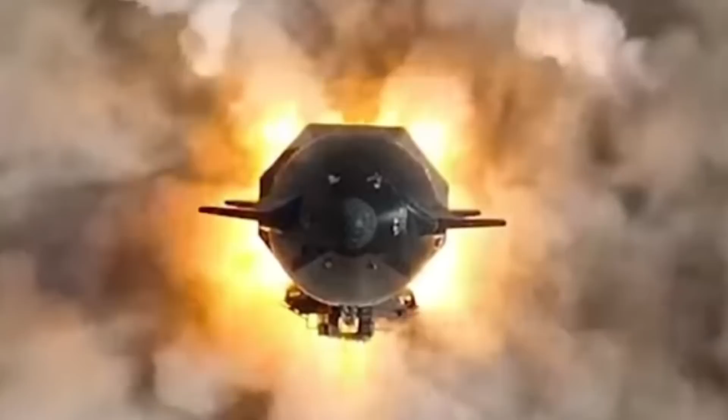A lot of people are worried about rising atmospheric carbon dioxide levels, and we should be. While it is true that carbon dioxide levels naturally fluctuate, and the levels have been higher in the past than they are now, people weren't alive back then when they were higher, and these ancient increases led to a dramatic shift in the climate. At this point, there is no reasonable doubt that human activity, specifically the burning of fossil fuels and forest clearings, has outpaced the Earth's ability to adapt and absorb carbon dioxide.

Within my lifetime, carbon dioxide levels have gone from 320 parts per million to just over 420 parts per million today. This has resulted in a warming of Earth's climate, and if it continues, there will be catastrophic damage to our crop yields along with extreme weather patterns and significant loss of land from sea level rise.

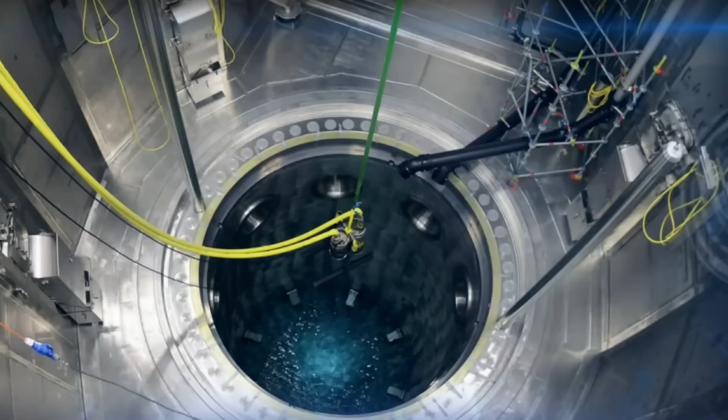That all being said, dealing with the problem has stirred up a lot of debate and government action, most of which has been worse than useless. While investments in wind and solar are now paying off, nuclear would be by far the best option.

But since there is a lot of political opposition to it, many governments have invested heavily in hydrogen fuel technology, which, except for a few niche applications, has been a wasteful distraction.

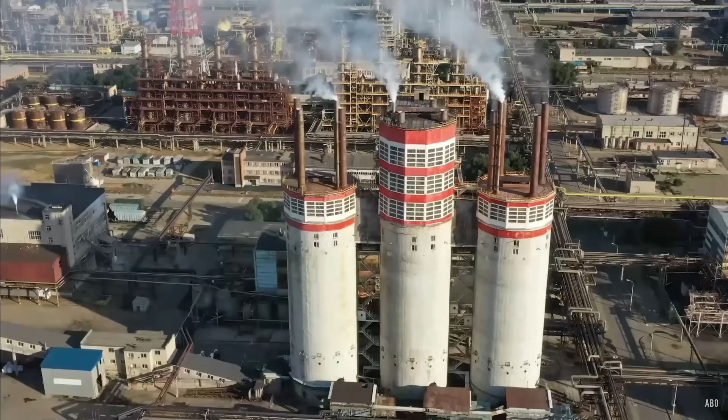Producing enough hydrogen gas today to power our homes, businesses, and transportation would produce much more carbon dioxide than just burning the fossil fuels, unless you use solar or nuclear. But nuclear plants take decades to build, and the electricity from solar power is better used being put directly into a battery. It is not efficient to use solar-powered electrolysis to produce hydrogen, then compressing and cooling it to extreme pressures and temperatures for storage before converting it back into energy.

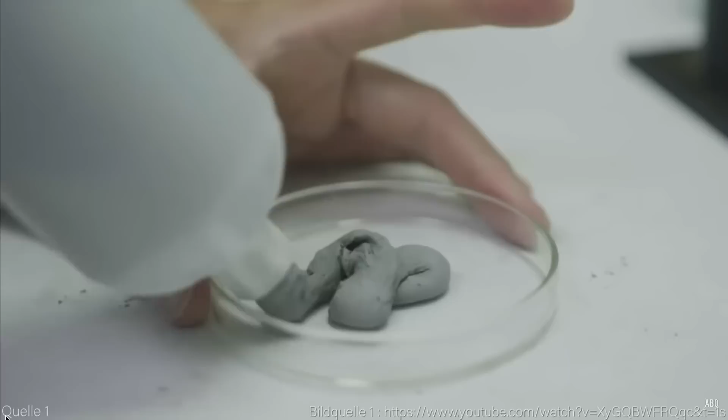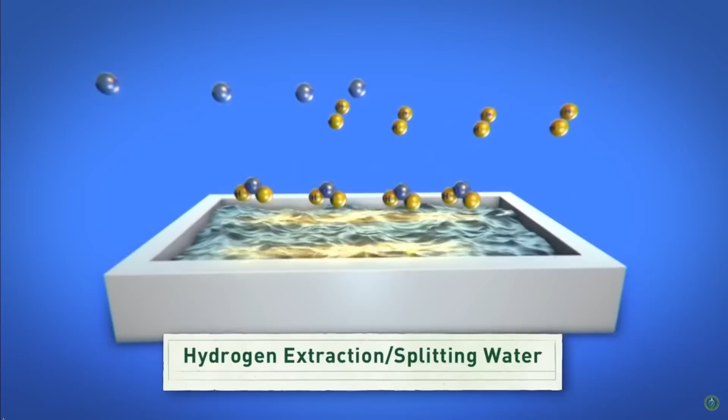We could instead store the hydrogen in power paste form, as pioneered by Fraunhofer Gesellschaft, headquartered in Munich, Germany. Power paste, which contains magnesium hydride, can hold an amount of hydrogen equal by volume to a high-pressure cryogenic tank, while still at ambient pressures and temperatures, needing only hot water to liberate the hydrogen for use in a fuel cell. If we could find a cheap and efficient way to make hydrogen, this would probably be the perfect storage solution. But right now and for the next couple decades, we can't make cheap hydrogen.

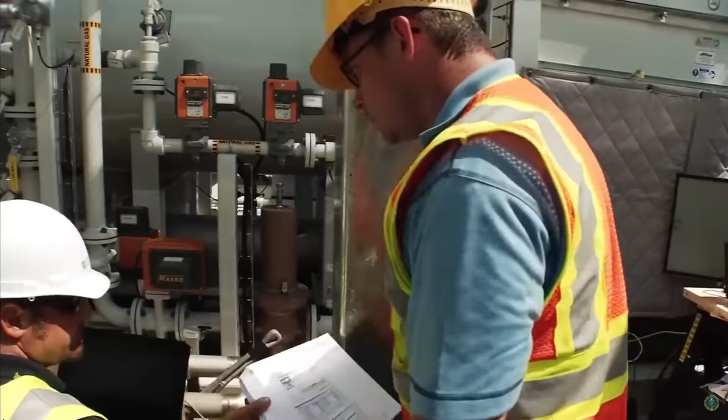And while fossil fuels are undoubtedly contributing to global climate change, the solution is not to abruptly stop using them, because doing so would kill millions, if not billions, of people through famine, extreme temperatures, and collapse of our current civilization. Fossil fuels became so ubiquitous for a reason. They are fairly easily available and are very energy dense. Almost all of the world's infrastructure runs on fossil fuels.

But is there any new technology becoming available now that could help ease this problem in the short term? Let's look to see if there's a better way.

Modern internal hydrocarbon combustion engines are about 25 to 40% efficient at turning fuel into energy. Boosting that efficiency to 50 or even 60% would allow us to produce the same or even more energy while still reducing carbon dioxide emissions. And the technology to do this efficiently is just becoming available to us.

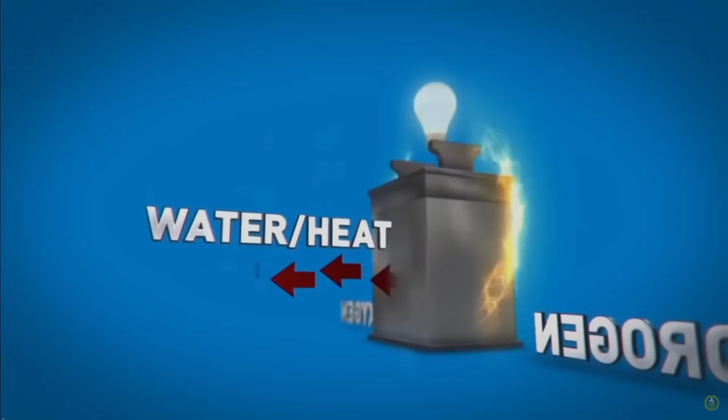The quest for efficient and sustainable energy sources has always been a driving force in human history. From fire to fossil fuels, we've sought ways to harness energy to power our world. In the late 19th century, the dawn of the electricity era sparked further interest in finding cleaner and more reliable energy solutions. Enter the fuel cell, an electrochemical device that converts the chemical energy of a fuel into electrical energy.

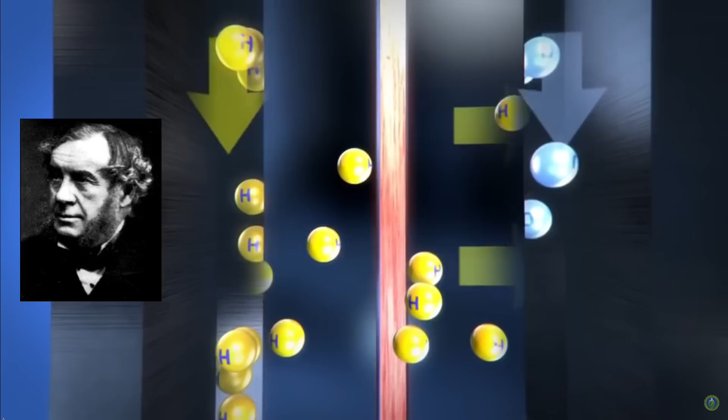The first fuel cells were invented in the early 1800s. Sir William Grove designed what he called a gas battery in 1839. But it wasn't until 1959, when a team of engineers at General Electric made them somewhat practical by designing a hydrogen oxygen fuel cell they called the Bacon cell, after its inventor Francis Thomas Bacon, not to be confused with the 19th century English philosopher.

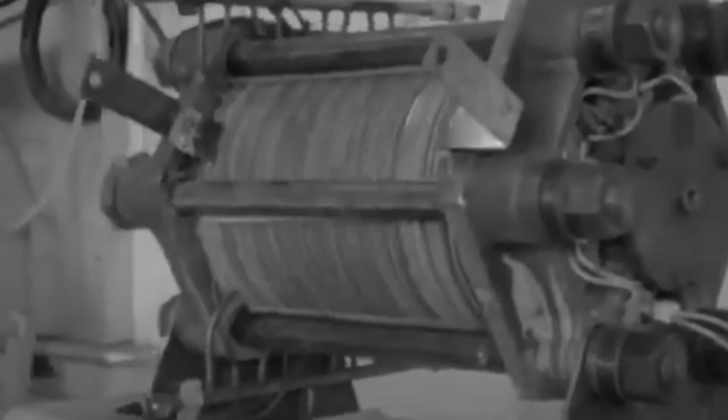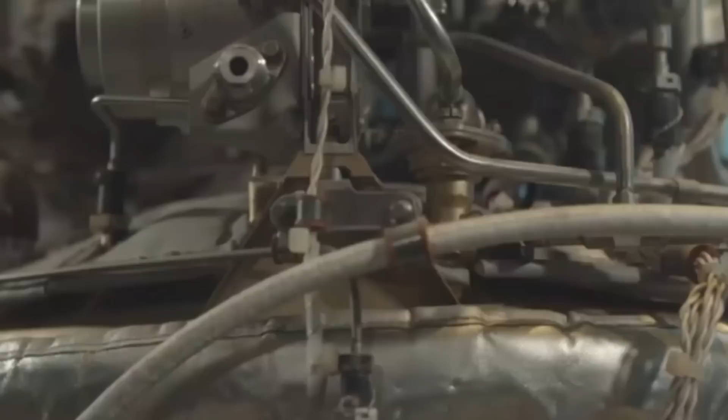Tom Bacon was a British engineer who lived from 1904 until 1992. His breakthroughs in the 1950s led to the famous Apollo fuel cells in the 1960s, which made traveling to the moon possible. These were alkaline fuel cells and produced up to 2.3 kilowatts of power, generating about 28 volts and 55 amps steadily for 2 weeks.

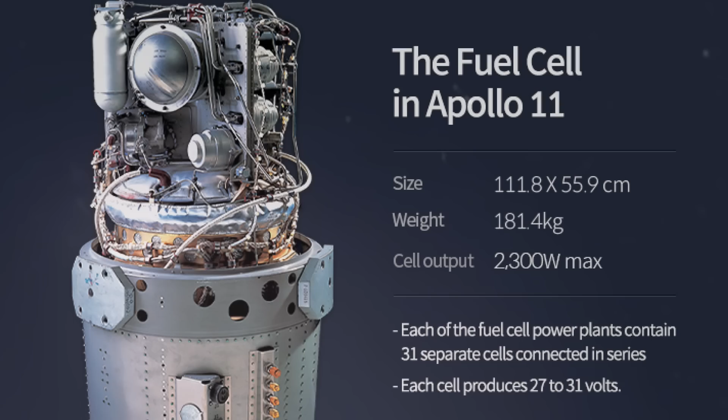These fuel cells had an efficiency of about 55%, while modern polymer electrolyte membrane fuel cells can now reach 60%. But these two types of fuel cells cannot tolerate any carbon contamination, like carbon dioxide or carbon monoxide gas. They must be fed pure hydrogen and oxygen to work, taking us back to the hydrogen production problem. And most fuel cells require very expensive platinum-based catalysts to allow them to work efficiently at even these temperatures.

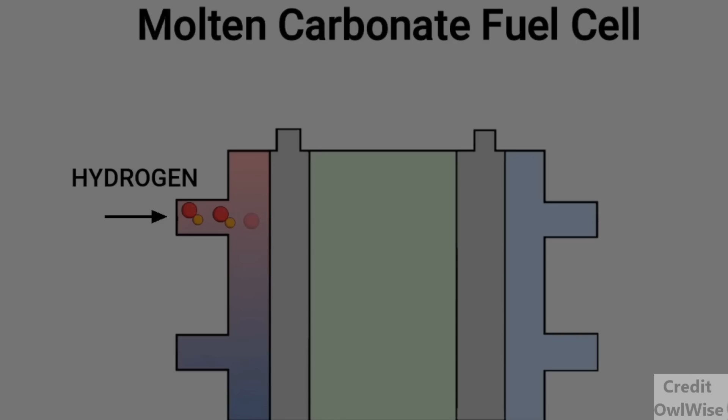Molten carbonate fuel cells, on the other hand, can use almost any hydrocarbon and still operate at about 50% efficiency. Raising the temperature and adding modern thermovoltaic cells could boost that as high as 75%, more than doubling the current efficiency of our hydrocarbon infrastructure.

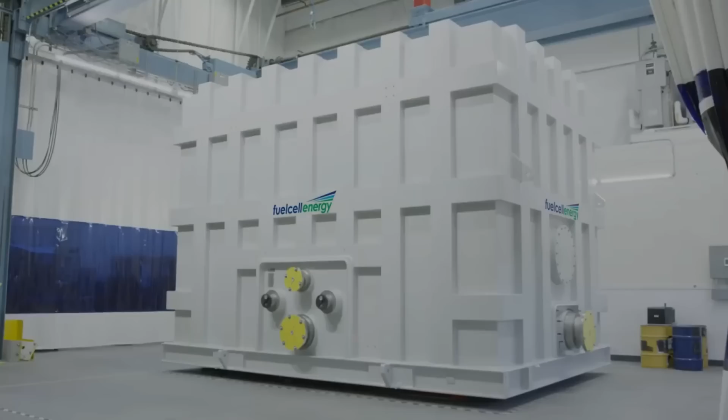So what sets the molten carbonate fuel cell apart? The molten carbonate fuel cell consists of several key components. At its core lies the electrolyte, a mixture of molten carbonates. This environment allows for efficient ion conductivity. On either side of the electrolyte, we find the electrodes. The anode, often made of nickel, allows the fuel to undergo oxidation, while the cathode, typically containing a porous material, facilitates the reduction reaction.

Molten carbonate fuel cells offer several advantages. First, their high operating temperatures, 600 to 700 degrees Celsius usually, enhance their efficiency and reduce the need for precious metals as catalysts. Second, they have a lower sensitivity to carbon monoxide, enabling the use of a broader range of fuels. Lastly, the waste heat generated by these cells can be harnessed for cogeneration.

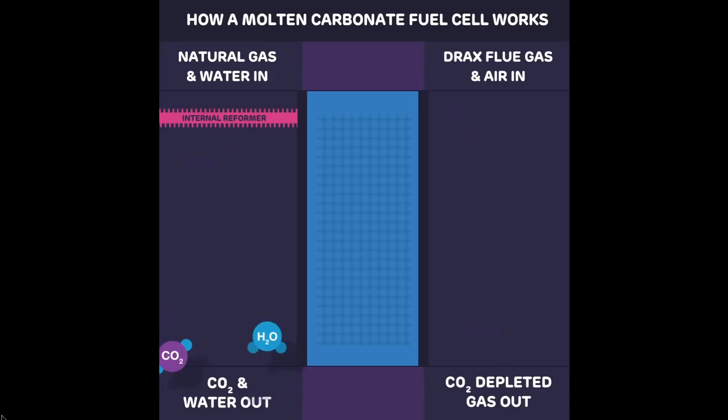Cogeneration, also called combined heat and power, is a process where a molten carbonate fuel cell system simultaneously generates electricity and utilizes the waste heat produced for other thermal applications, like those thermovoltaic cells we mentioned earlier.

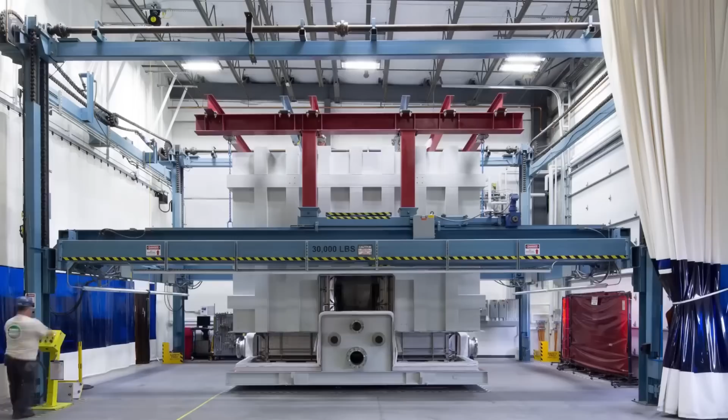Beyond their efficiency and versatility, molten carbonate fuel cells play a crucial role in mitigating climate change. By using carbon-based fuels such as biogas or natural gas, these cells allow for the offsetting of greenhouse gas emissions from car engines and power stations.

The materials used in molten carbonate fuel cells are carefully selected to withstand the harsh operating conditions. High-temperature alloys, ceramic electrolytes, and specialized catalysts are employed to ensure longevity and performance.

The utility of molten carbonate fuel cells extends beyond our planet. In the realm of space exploration, these cells hold promise for producing reliable power in challenging environments. On Mars, where traditional energy sources are scarce, and solar power is reduced to less than half of what it is on Earth, molten carbonate fuel cells could become vital for sustaining human colonies.

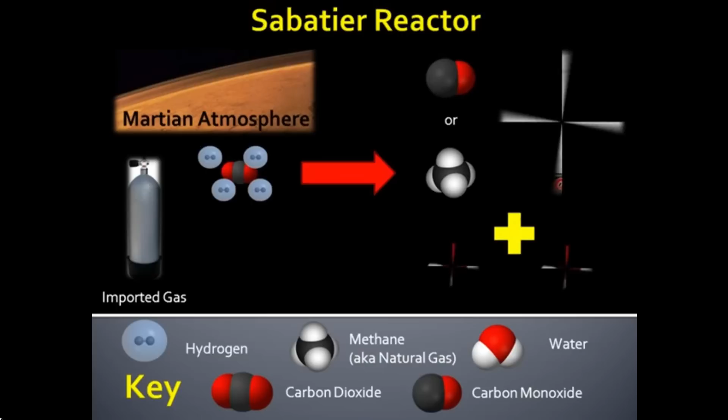Liquid methane is much easier to store than liquid hydrogen, and can be produced through the Sabatier process on Mars, by combining hydrogen gas, electrolyzed from the water on Mars, with carbon dioxide taken from the Martian atmosphere. This produces fuel for the starships that will be landing on Mars, and when combined with the other product of water electrolysis, oxygen, produces effective reactants for our rovers.

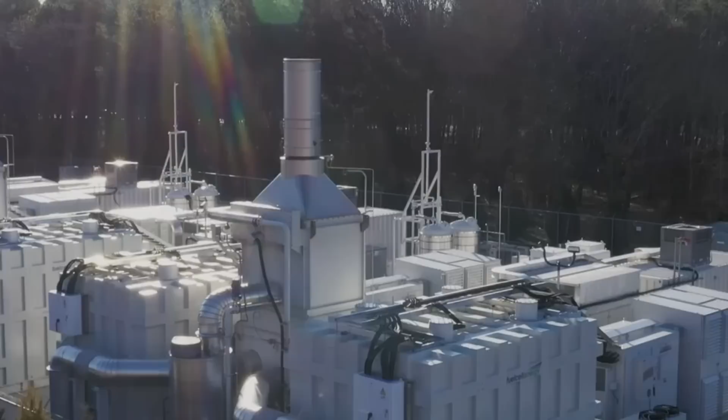Rovers equipped with molten carbonate fuel cells could produce electricity for power and heat to keep the astronauts warm as they explore the surface. But molten carbonate fuel cells impose significant challenges on the materials from which they are constructed due to the extreme operating conditions they endure.

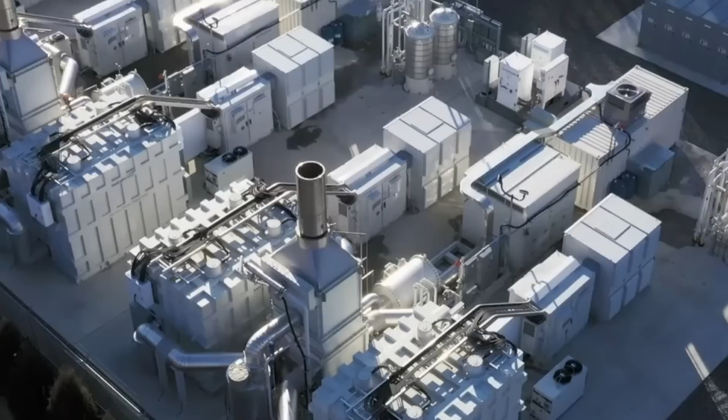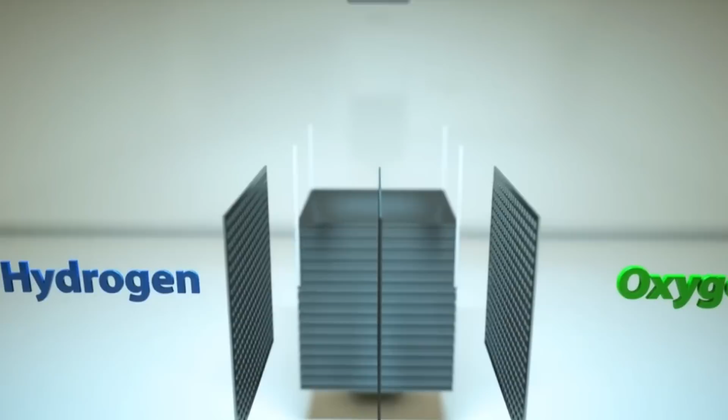MCFCs operate at high temperatures, again typically around 600 degrees Celsius or 1,112 degrees Fahrenheit, in the presence of corrosive molten carbonate electrolytes. These conditions can subject the materials to various forms of degradation, including thermal stress, chemical reactions, and corrosion. The molten carbonate electrolyte can react with metals, alloys, and ceramics, potentially leading to material loss, erosion, and degradation of efficiency over time. To withstand these harsh conditions, materials for MCFCs need to exhibit excellent high-temperature stability, corrosion resistance, mechanical strength, and long-term durability.

Researchers and engineers are continuously exploring and developing advanced materials and coatings that can withstand the demanding environment of MCFCs. Catalysts also play a crucial role in the operation of molten carbonate fuel cells, facilitating the electrochemical reactions that occur at the fuel cell electrodes. MCFCs typically employ catalysts to enhance the kinetics of the oxygen reduction reaction at the cathode and the fuel oxidation reaction at the anode.

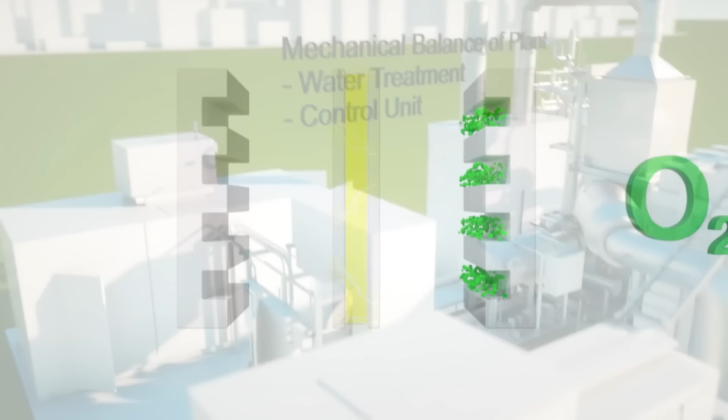These catalysts can significantly influence the overall performance and efficiency of the MCFC. Platinum and palladium, called noble metals because they don't react much to other metals, are commonly used as catalysts due to their excellent electrochemical properties. However, the high cost and limited availability of these noble metals poses challenges for widespread commercial adoption.

Even as energy suppliers continue to rely more on wind and solar power, increases in energy demand will require diverse portfolios that include coal and biomass. Researchers at Idaho National Laboratory can now turn such carbon sources directly into electricity without producing many of the pollutants associated with burning fossil fuels or biomass in a power plant.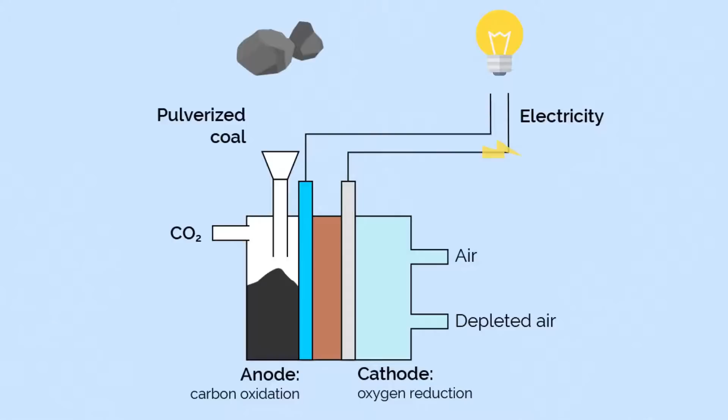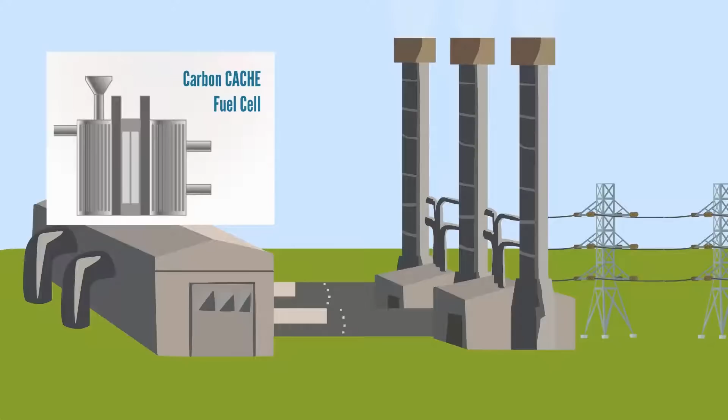Direct carbon fuel cells turn finely ground carbon directly into electricity via an electrochemical reaction. The concept is similar to hydrogen fuel cells that power everything from cars to rockets. But unlike hydrogen, which takes a lot of energy to produce, the fuel for direct carbon fuel cells comes directly from biomass or coal. Now, the carbon cache represents a new generation of direct carbon fuel cell.

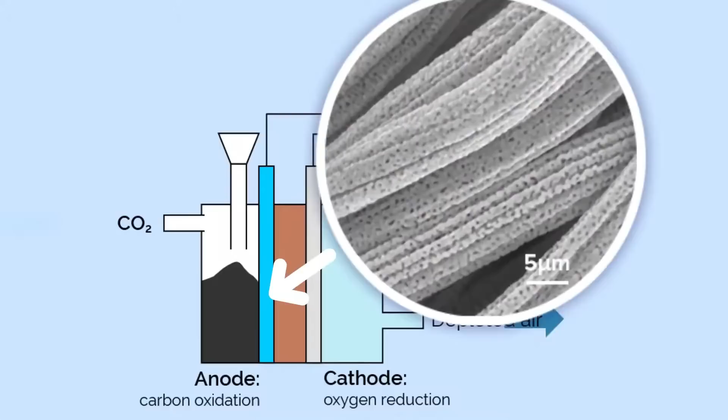First, the inventors developed an anode made of woven ceramic that is both hollow and porous. This design allows more carbon fuel to contact the anode, increasing the reaction's efficiency. Second, they devised a carbon carbonate fuel that flows better at lower temperatures than carbon alone. The improved fuel enhances contact with the anode, further improving the cell's efficiency.

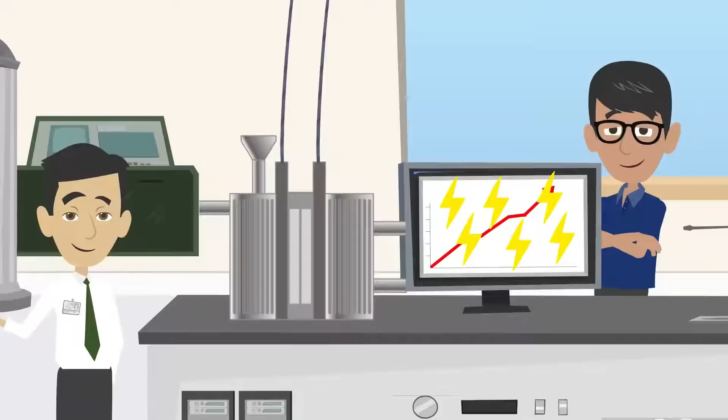In the end, carbon cache's peak power density is 6 times higher than existing DCFCs at lower temperatures. Since it produces nearly pure CO2 without other pollutants, carbon capture technologies are easier to implement. Carbon cache could make electricity generation from resources such as coal and biomass cleaner and more efficient.

The technology has drawn the attention of companies in the US and Canada that wish to explore the fuel cell's potential for commercial-scale electricity generation.

These advancements in catalyst technology aim to maximize the efficiency and cost-effectiveness of MCFCs, making them a more viable and sustainable option for clean energy generation. The higher temperatures of molten carbonate fuel cells may be hard on the materials, but they have a positive impact on the efficiency of MCFCs. Here are some reasons why.

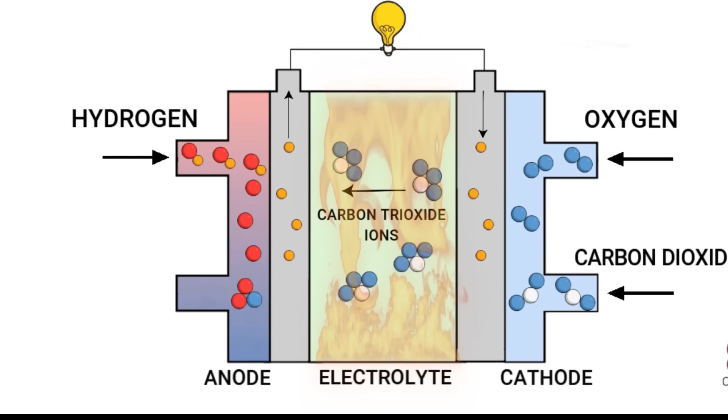MCFCs operate at elevated temperatures, typically above 600 Celsius. These higher temperatures accelerate the reaction rates, leading to more efficient conversion of chemical energy into electricity, thus improving the overall fuel cell efficiency.

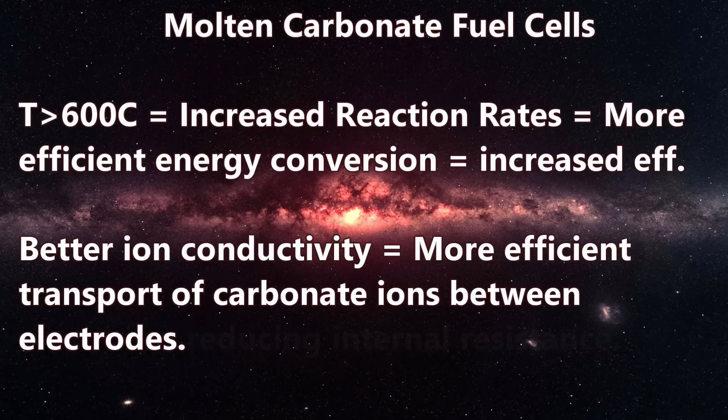The molten carbonate electrolyte used in MCFCs exhibits better ion conductivity at high temperatures. This improved ionic mobility allows for more efficient transport of carbonate ions between the electrodes, facilitating the electrochemical reactions and reducing internal resistance within the fuel cell. Lower resistance translates to less energy loss and improved overall efficiency.

High temperature operation improves the thermodynamic efficiency of MCFCs. According to the Carnot efficiency limit, the maximum theoretical efficiency of a heat engine increases with higher operating temperatures. By operating at elevated temperatures, MCFCs can approach this thermodynamic limit, resulting in improved energy conversion and overall fuel cell efficiency.

MCFCs generate substantial waste heat due to their high temperature operation. This waste heat can be harnessed and utilized for cogeneration purposes, such as the combined heat and power systems we spoke of earlier. By simultaneously producing electricity and capturing waste heat for heating or other industrial purposes, the overall efficiency of MCFCs can be significantly enhanced.

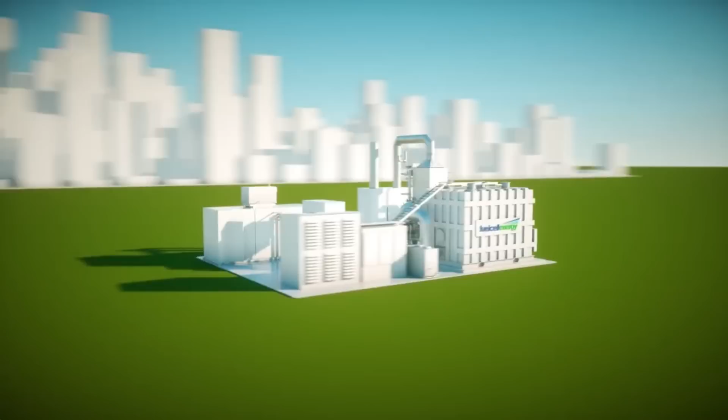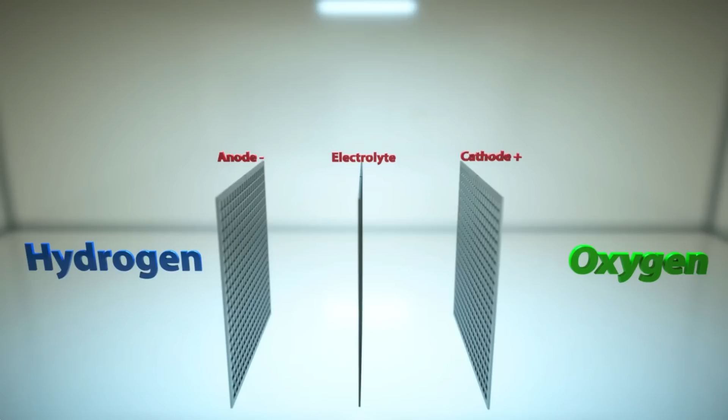But remember, the high temperature operation in MCFCs also presents very serious challenges on material durability, corrosion, and long-term stability. Most molten carbonate fuel cells utilize nickel-based alloys for their construction. The specific nickel-based chromium alloy commonly employed in MCFCs is Inconel, typically Inconel 601 or 625.

Inconel alloys are highly resistant to the corrosive nature of the molten carbonate electrolyte, which is a crucial requirement for maintaining the integrity and longevity of MCFC components. These alloys can withstand the harsh operating conditions of MCFCs, including high temperatures and the presence of reactive carbonate ions.

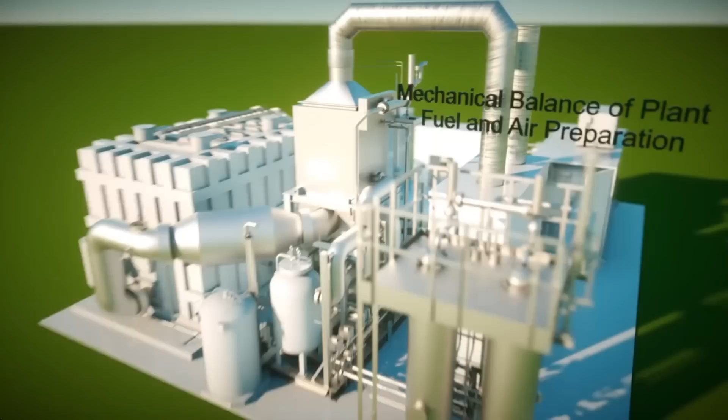Additionally, Inconel alloys possess favorable mechanical properties, such as high tensile strength and good thermal stability, which are essential for supporting the structural integrity of MCFC components. These alloys exhibit dimensional stability under the thermal cycling experienced during startup, shutdown, and load cycling of the fuel cell.

But while Inconel has been amazingly effective as a high-temperature corrosion-resistant material so far, even better alloys are being developed thanks to advanced technologies. One of these innovative alloys invented by NASA is GRX 810.

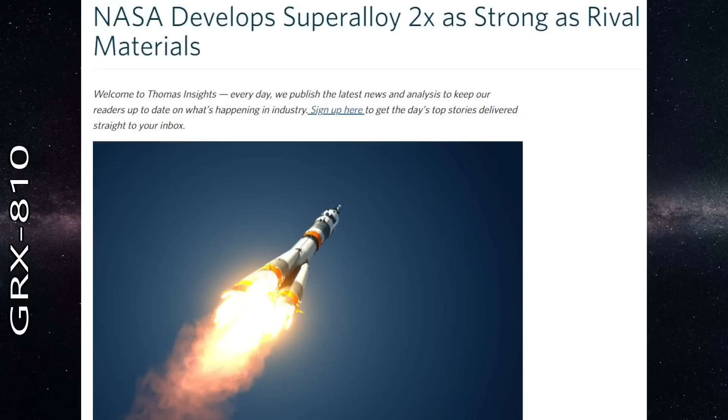This is a 3D printed alloy that fuses specific metals in specific patterns layer by layer. It has turned out to be twice as strong, over 1,000 times more durable, and twice as resistant to corrosion compared to the best older alloys.

These unique properties could make it possible to run molten carbonate fuel cells at much higher temperatures, which could dramatically improve efficiency and increase cogeneration. Let's look closer at this amazing alloy and its advantages in the context of high-temperature fuel cells.

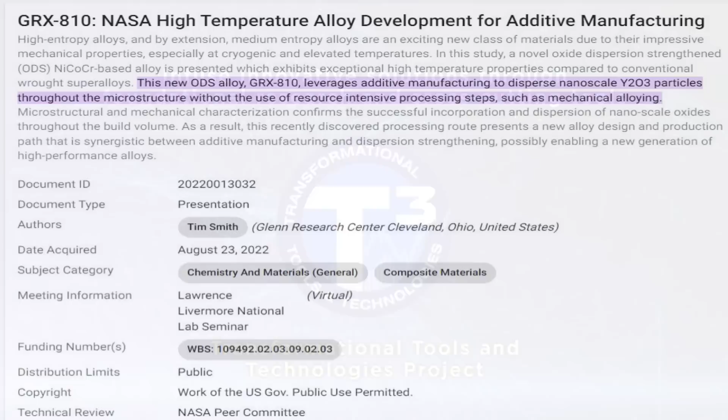GRX 810 is a part of NASA's Transformational Tools and Technologies project and is an oxide dispersion strengthened alloy. The project used intelligent thermodynamic modeling to predict an alloy's characteristics, then advanced 3D printing technology to produce it for testing.

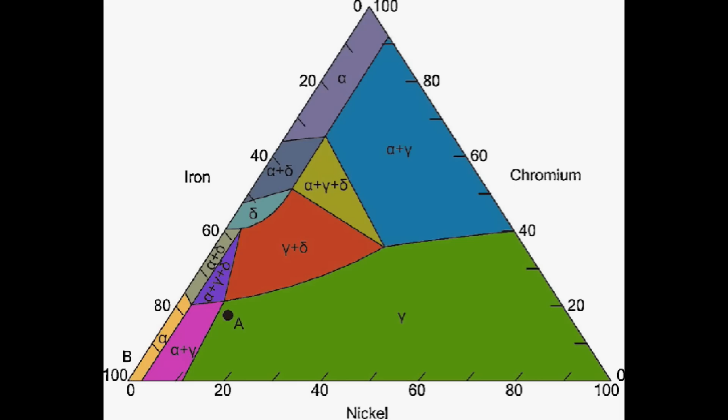Alloys are composed of a combination of metals and have been used for thousands of years. The Bronze Age started when humans learned to melt and mix copper and tin, creating a much stronger and more durable metal. Steel is a mixture of iron and carbon, and stainless steel, discussed in this lesson, was discovered when researchers added chromium. Inconel was made by mixing mostly nickel and chromium.

When molten elements are mixed, they spontaneously form certain patterns. The most common patterns formed are simple cubic, face-centered cubic, body-centered cubic, hexagonal closest packed, and cubic closest packed. What pattern the elements assume can affect the alloy in profound and complex ways, and small amounts of other elements can be added to coax the main elements into desired patterns.

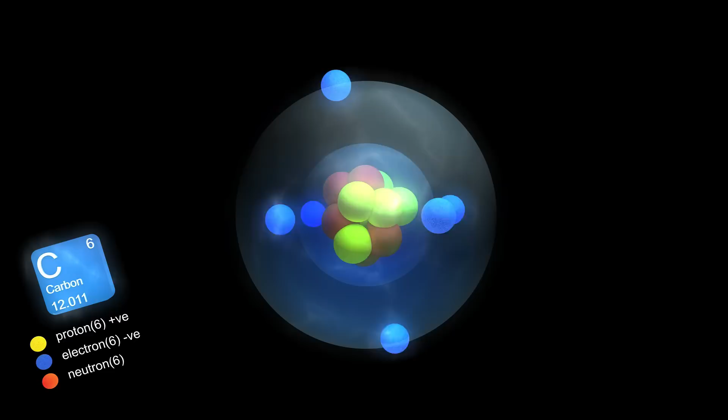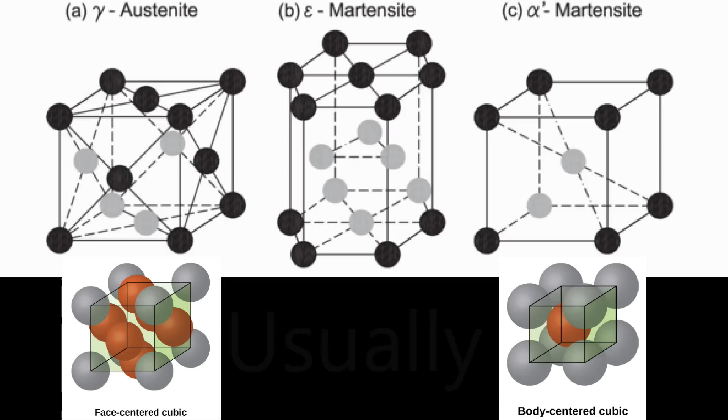The two main types of steel are austenitic and martensitic. Austenitic steel is face-centered cubic, while martensitic steel is body-centered cubic. Austenitic stainless steels are primarily composed of iron, chromium, and nickel, with smaller amounts of other elements such as manganese and nitrogen. The most common austenitic stainless steel is 18-8 stainless steel, which contains approximately 18% chromium and 8% nickel. The chemical formula for this alloy is typically represented as FeCrNi.

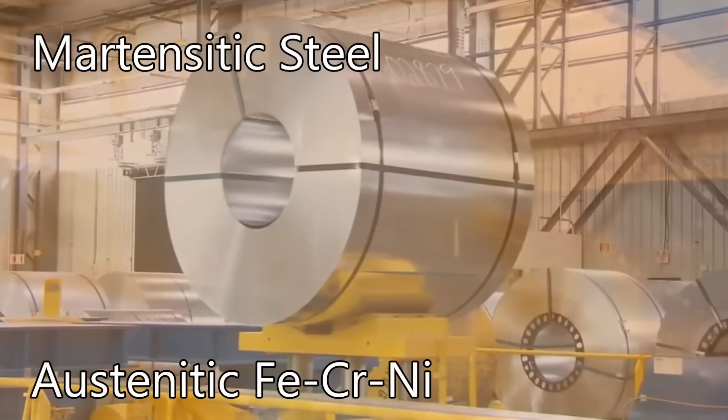Martensitic stainless steels have a higher carbon content compared to austenitic steels, which allows them to be hardened through heat treatment. They are primarily composed of iron, chromium, and carbon, with smaller amounts of other elements. The chemical formula for martensitic stainless steels is typically represented as FeCrC.

By the way, the steel used by SpaceX to build its starships is called SX500, or SpaceX stainless steel. It is a type of martensitic steel with a unique mix of other elements, the exact formulation of which is a trade secret. But these additives make it more heat resistant while maintaining its strength at cryogenic temperatures.

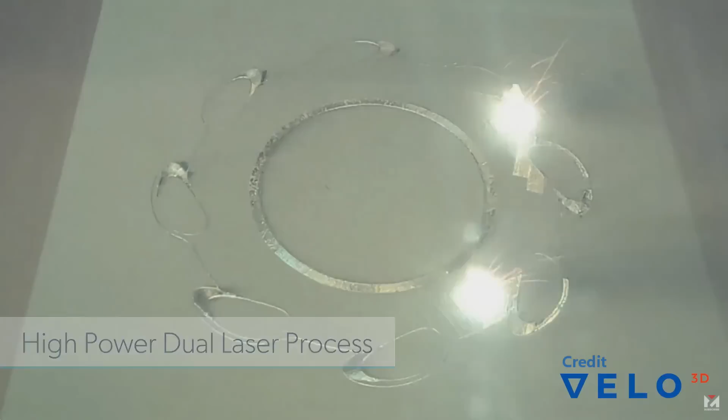This mixing and production method worked well throughout the 20th century, giving us better and better alloys. But when 3D metal printing was developed, allowing us to make metal works of engineering art impossible by any other method, it caused material scientists to start wondering about using this technology to put nanoscale particles of each element exactly where they wanted them. Now remember, nanoscale means dimensions on the order of 10 to the minus 9 meters, a billionth of a meter.

This would allow us to think up a pattern that looks promising, with the help of computer systems for thermodynamic modeling, and then print a potentially useful alloy in just a few hours. The scientists discovered GRX-810 after just 30 simulations.

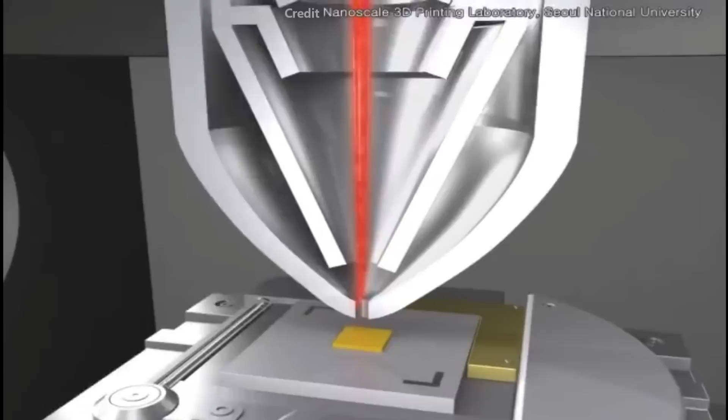The manufacturing process involves selectively melting and layering carefully placed nanoparticles of the specific metal powders, and using a laser or electron beam to fuse and create complex structures. Printing and testing the alloy confirmed its amazing properties.

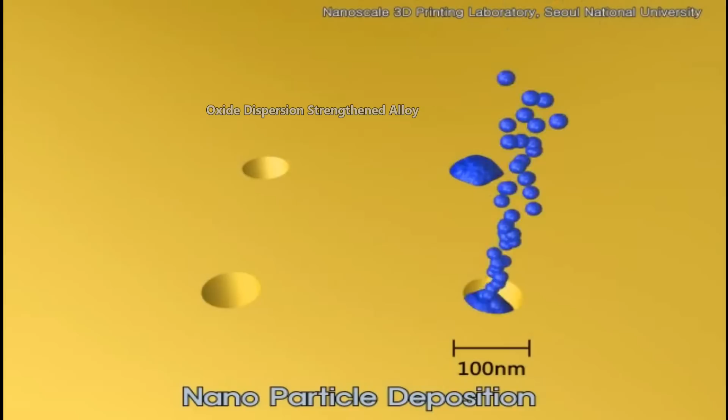GRX-810 is an oxide dispersion strengthened alloy, also called ODS. This means it is a class of materials that combines a metal matrix with small and uniformly dispersed oxide particles. These particles are usually composed of yttrium oxide or titanium oxide, uniformly distributed within the metal matrix.

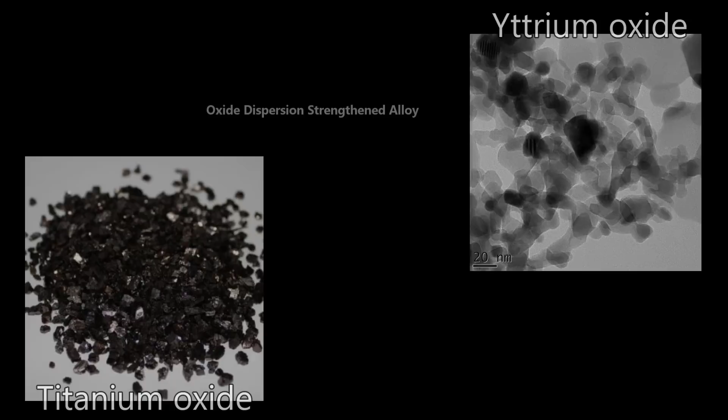The particles act as strengthening agents and effectively hinder dislocation movement, enhancing the alloy's strength and resistance to deformation, allowing these alloys to have excellent mechanical strength and creep resistance, thus preventing grain growth and maintaining strength even at high temperatures, making them perfect for high-temperature, high-stress environments, like rocket and jet engines, but also for high-temperature efficient molten carbonate fuel cells.

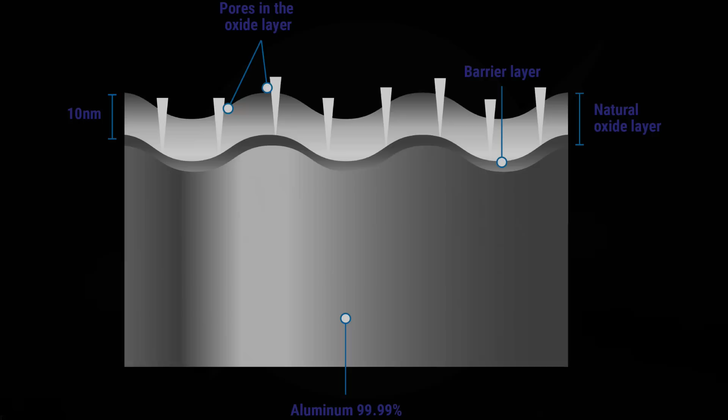The presence of oxide particles in ODS alloys also enhances their resistance to corrosion and oxidation. The oxide particles act as barriers, hindering the diffusion of corrosive species and protecting the underlying metal matrix from degradation. Think of it like the layer of aluminum oxide, also known as sapphire, that forms over aluminum metal, making it more resistant to corrosion. Fuel cells often operate in corrosive environments due to the presence of reactive gases and electrolytes. GRX-810 demonstrates remarkable corrosion resistance, allowing it to withstand the harsh conditions encountered in these fuel cells.

ODS alloys are also known for their resistance to radiation damage. The dispersed oxide particles act as sinks for radiation-induced effects, such as dislocations and vacancies, effectively reducing their mobility and preventing the degradation of the alloy's mechanical properties under irradiation.

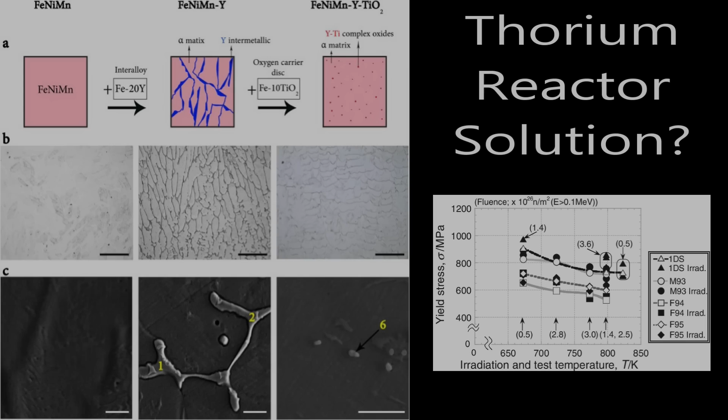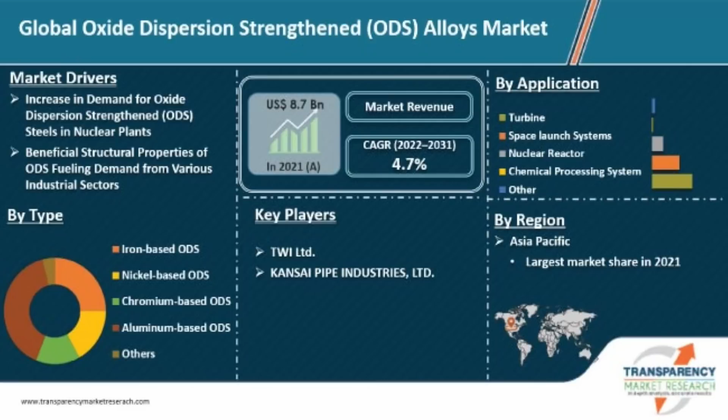This combination of high-temperature strength, corrosion resistance, and radiation resistance will make these alloys perfect for applications like advanced nuclear reactor components, gas turbine engines, heat exchangers, rocket engines, fuel cells, and high-temperature structural applications for aerospace and energy sectors. The invention of this amazing alloy could revolutionize our efficiency while reducing our impact on the environment.

Imagine a battlefield ambulance made from a Cybertruck or Ford F-150, towing behind it an efficient hydrocarbon-fueled molten carbonate fuel cell generator. This system could efficiently use anything from liquid natural gas to potentially coal, allowing the vehicle to travel thousands of miles on the battlefield, saving lives.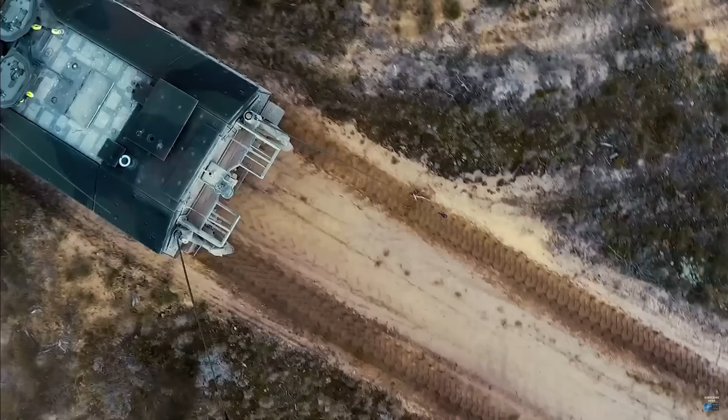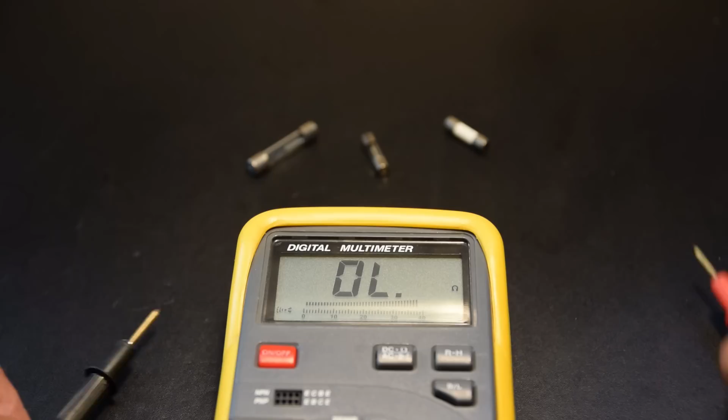While this would be an amazing way to make our existing infrastructure more efficient, there are other applications to this technology. GRX 810 is also electrically conductive. The alloy's metallic matrix enables efficient electron transfer within the fuel cell, facilitating the generation and flow of electrical current. Electronics made from this material may solve our problem of making computers work on Venus.

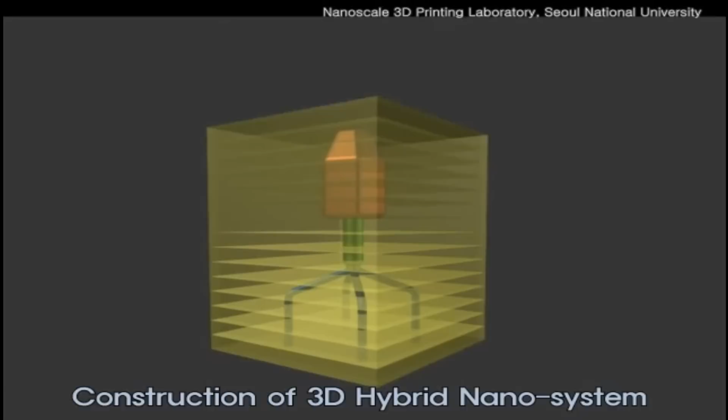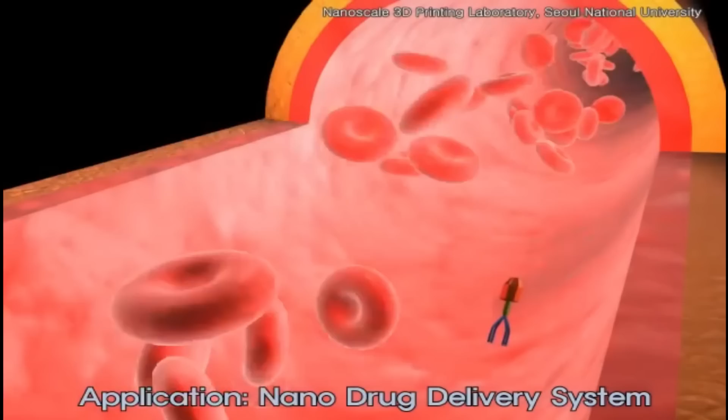What is the future of this nanoscale variable material printing technology? How long will it be before we can print solid-state computers and other electronic devices on the picoscale, 10 to the minus 12 meters? A single carbon atom is about 70 picometers in diameter, while one of copper is about 135 picometers. Using advanced atomic printing technology, a civilization could make electronic components at the smallest possible scale, limited only by quantum tunneling effects and the uncertainty principle.

A device made in this manner would be almost impossible to disassemble and analyze, and we would need to use gamma-ray lasers to scan the interior.

As an interesting aside, if the unexplained aerial phenomena being talked about in the news, including the stories of recovered alien ships and beings, has any validity, and I am still skeptical, I'll make a few predictions. First, we did not shoot them down, and they didn't travel all the way from another star system just to fall asleep at the wheel and crash on arrival.

There would have to be 2 or more species, or 2 or more factions within one species, that don't agree on how to deal with us. And they are shooting each other down.

And I will make one more prediction. If we have recovered the technology of species capable of traversing the interstellar blackness, that technology is solid-state 3D printed on the atomic scale. And we are like ancient Egyptians with an iPad, brilliant in our own way, but limited by the current progress of our civilization.

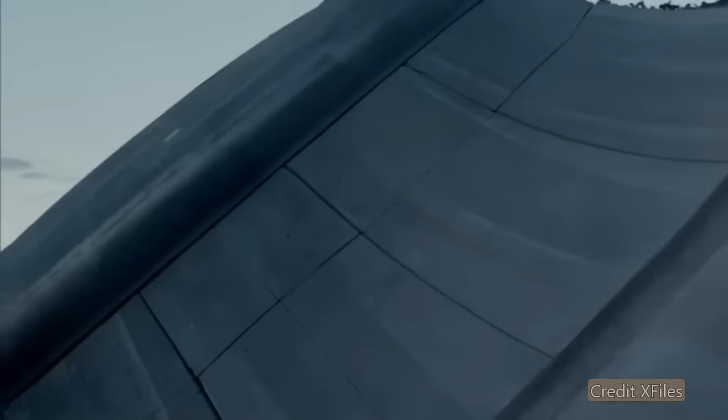We might be able to operate it for a little while, at least until the battery runs down. But we would lack the tools needed to analyze and duplicate it, at least for quite a while.

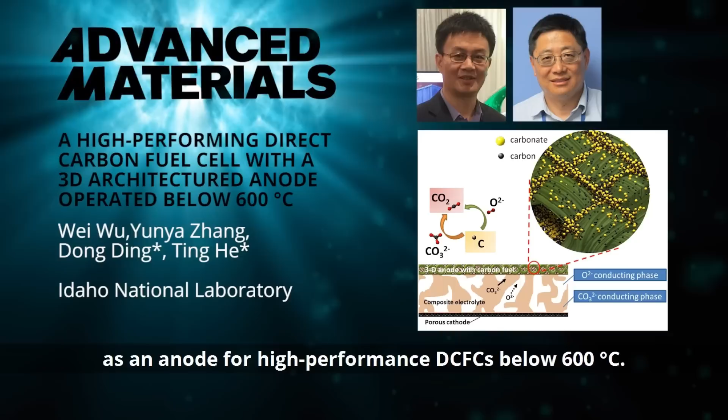In their communication in Advanced Materials, Dong Ding, Ting He, and co-workers from Idaho National Laboratory in the United States fabricate an ultra-porous ceramic framework with 3D architecture as an anode for high-performance DCFCs below 600 degrees Celsius.

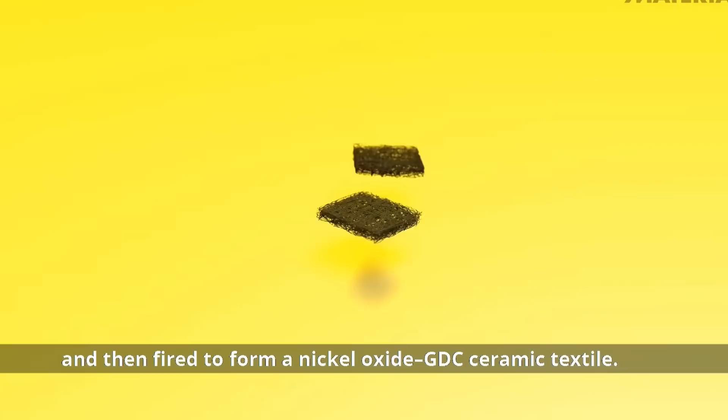A fabric textile coupon was immersed in a solution of a highly conductive cerium gadolinium oxide compound, or GDC, and nickel precursor, and then fired to form a nickel oxide GDC ceramic textile. The ceramic textile was punched to size and then bonded on the top of a GDC carbonate electrolyte using a nickel oxide binder suspension, followed by a co-firing process.

A mixture of carbon and carbonate was loaded on the 3D anode frame before the fuel cell assembly. The as-prepared ceramic textile has sufficient mechanical strength and flexibility and can be readily applied to numerous electrochemical devices.

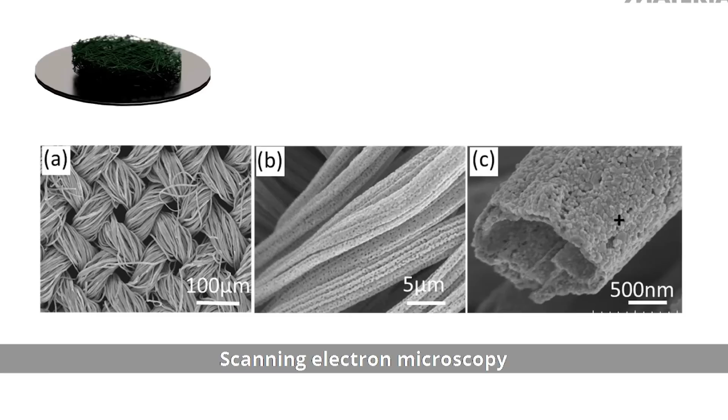Scanning electron microscopy of a calcined 3D anode framework revealed bundles of hollow nickel oxide GDC fibers knitted together. This porous structure allows penetration of carbon particles.

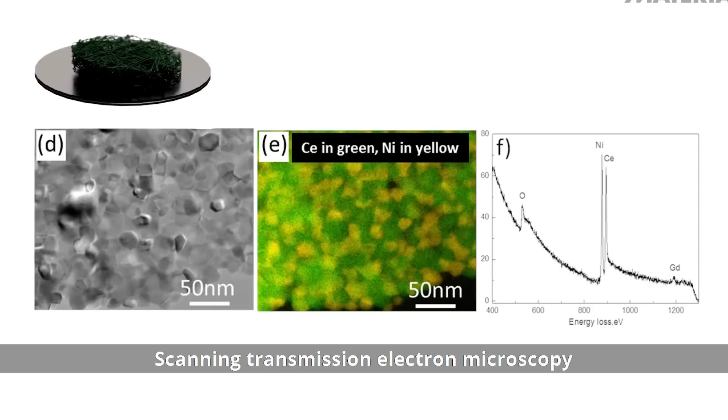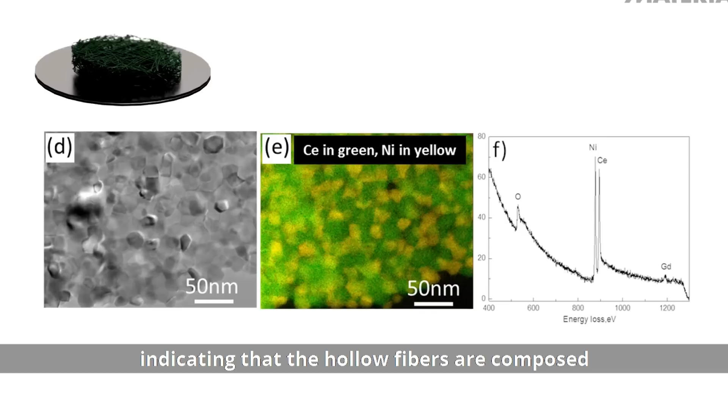Scanning transmission electron microscopy shows a uniform distribution of nickel and cerium elements, and electron energy loss spectroscopy shows peaks corresponding to oxygen, nickel, cerium, and gadolinium, indicating that the hollow fibers are composed of nickel oxide and GDC.

In this technology, the solid carbon can readily go through our 3D ultraporous electrode and reach the interface between electrolyte and electrode, realizing the direct electrochemical oxidation rather than gasification into carbon monoxide, which is the actual fuel for most direct carbon fuel cells.

A DCFC operating at 500, 550, and 600 degrees Celsius demonstrates excellent performance with maximum power densities of 143, 196, and 325 milliwatts per square centimeter, respectively.

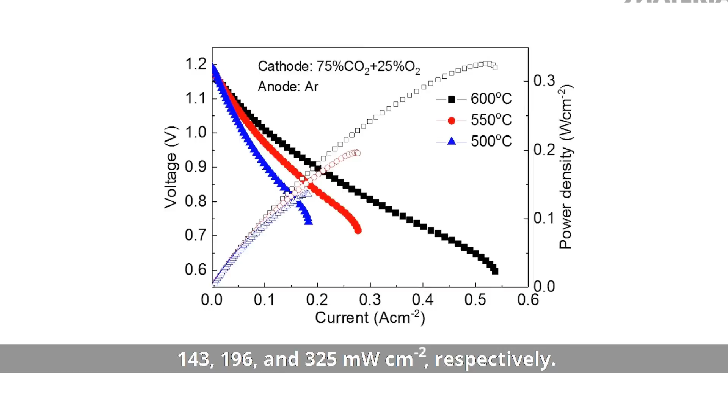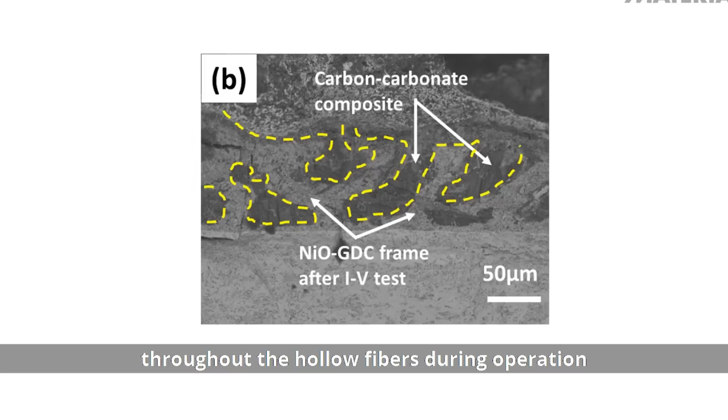The 3D anode framework before loading the carbon fuel shows excellent contact between the hollow fibers and the GDC carbonate electrolyte. Addition of carbonate to the carbon fuel increases the carbon particle distribution throughout the hollow fibers during operation and extends the triple phase boundaries region, leading to improved performance.

We do believe that it will have a significant impact on our society when a variety of fuels such as coal, coke, tar, biomass, and organic waste are used for efficient electricity generation with much less carbon footprint.